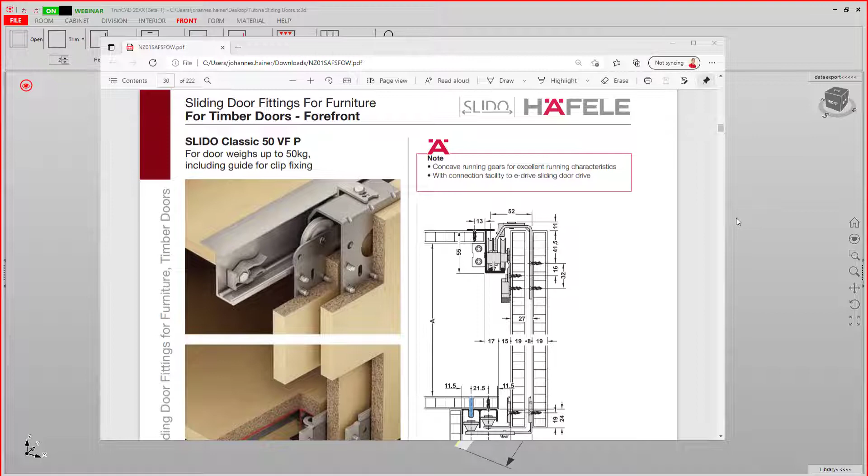Hello, in this tutorial we will create sliding door fittings for front mounting to use in TrunCAD. Therefore, we go to Front, Sliding Door, and here to our hardware settings. First, we need to enter a name for our new hardware.

Then, we need to set the middle overlap of the doors. Then we need to set the overlap on the top and on the bottom. On the top we have 19 mm, since these doors are flush with the upper side of our cabinet.

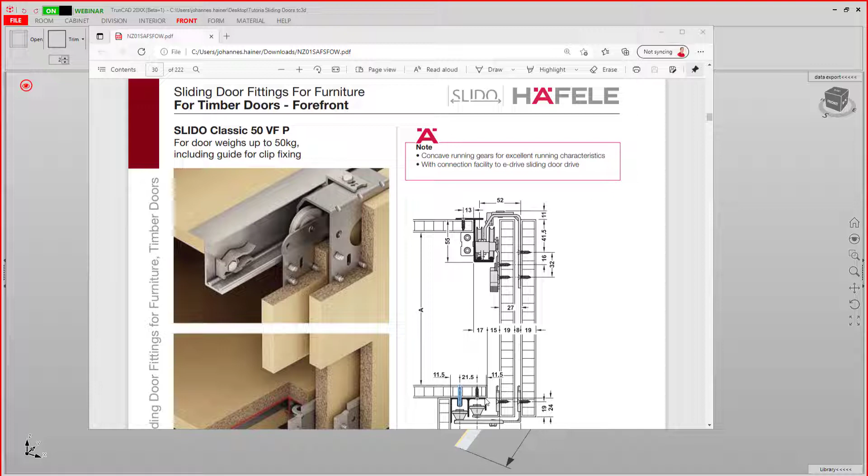On the bottom we have 19 plus 24 mm, since the doors protrude 24 mm over the bottom panel. This means we have 43 mm overlap on the bottom.

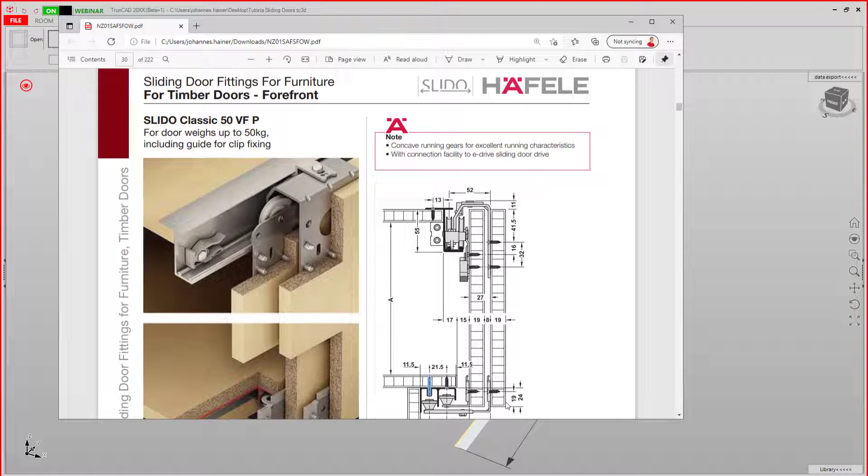The next thing we need to set is our distance of the lanes. First lane is 15 plus 19 plus 8 plus 19 mm. The second lane is 15 plus 19 mm. Therefore, we need to enter minus 61 for the first lane and minus 34 for the second lane.

We don't need a groove this time because we have an aluminum profile. Next thing we need to set is our reference point. This time we take the upper left edge of our door. Next thing we need to set is the direction of the boreholes. This is why minus in this case.

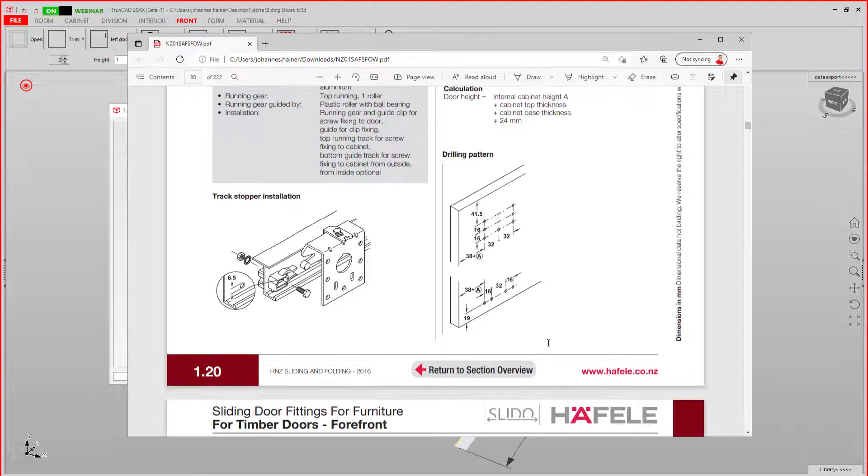Then we can drill our front mounting holes. The first hole in X direction is 38 and in Z direction minus 41.5. Since we use screw mount, we don't need deep holes. We just bore them 2 mm deep. Diameter of 5 and add this. Also make sure to check mirror holes, so that all the holes you add are automatically mirrored.

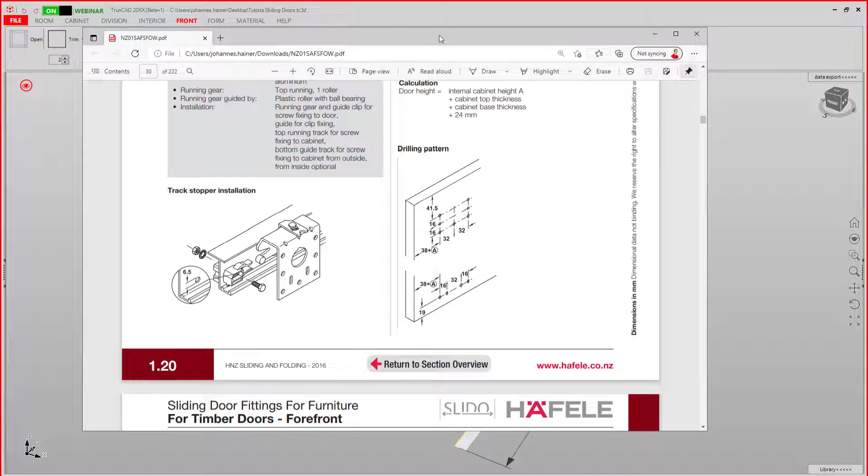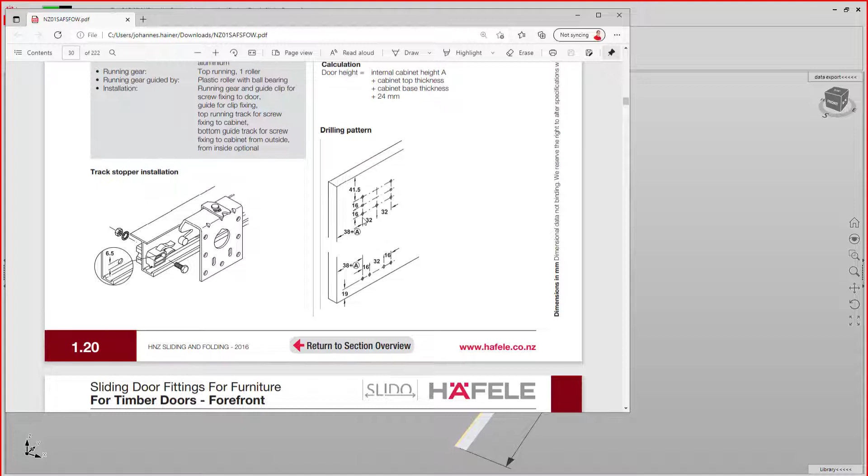The next hole is 57.5 from the top. Add plus. And the next is 73.5 from the top. Also hit plus. The next hole is plus 32 mm in X direction. This means it's at 70.

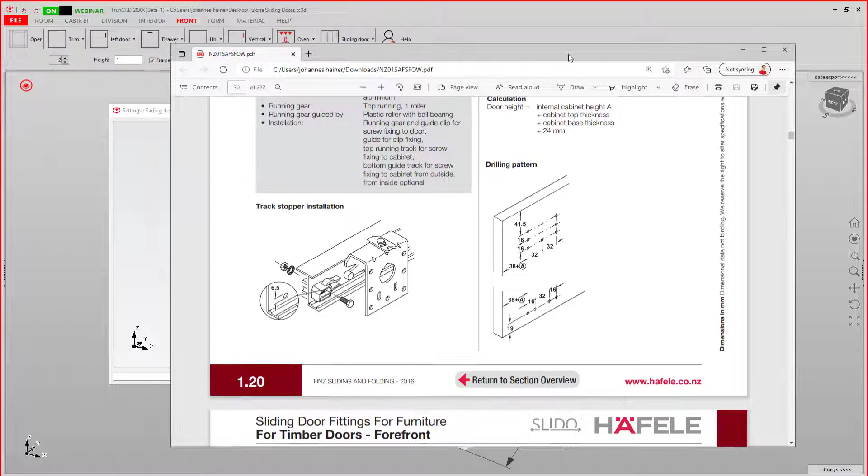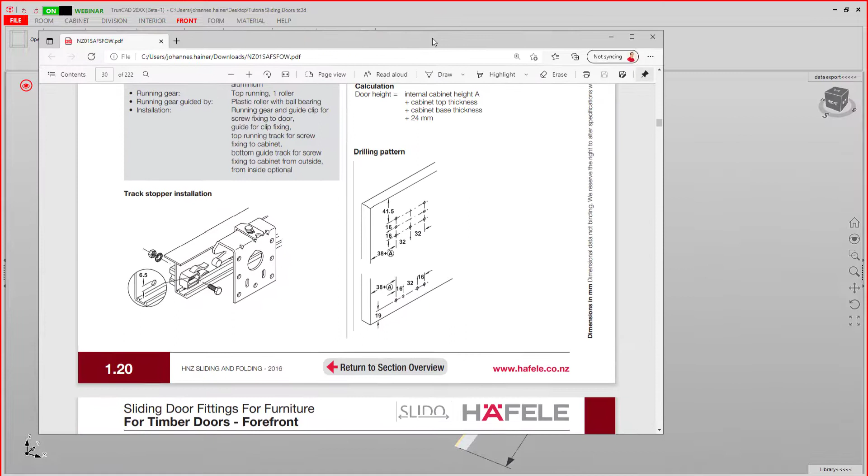Then hit plus. The next one is additional 32 mm in X. We enter the value and hit plus. The same for the next two values. Now that we have the top row, we take care of the bottom boreholes.

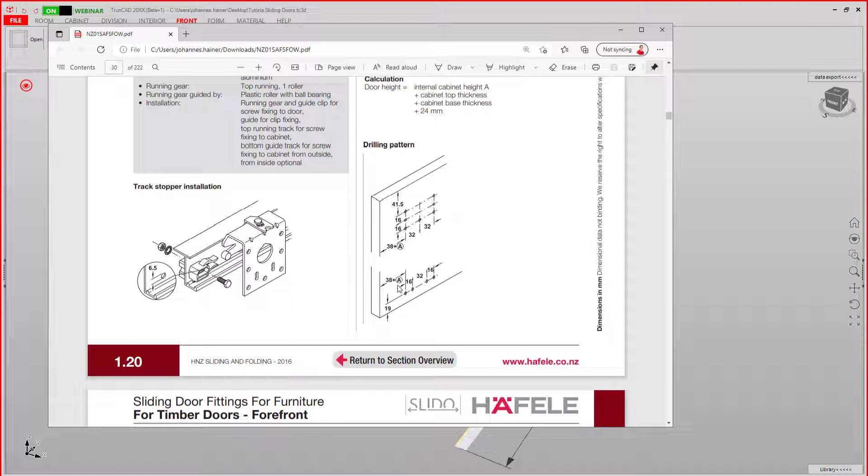The first hole here is also 38 mm in X direction and 19 mm from the bottom. Because of this, we first set our reference point to the bottom left. Enter our 38 mm and 19 mm and hit plus. Next hole is in X direction at 54 mm. Then we hit plus.

Plus 32 equals 86 mm. Then hit plus. The next hole is plus 16 mm, which is 102. Then hit plus again. Then save and close.

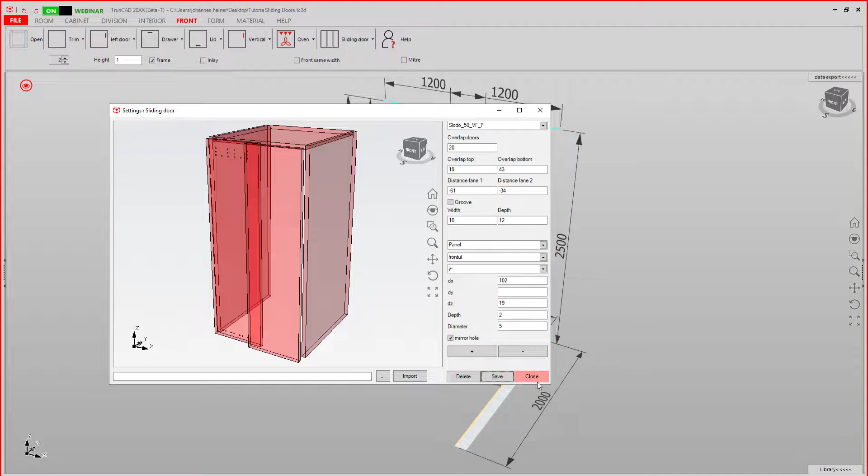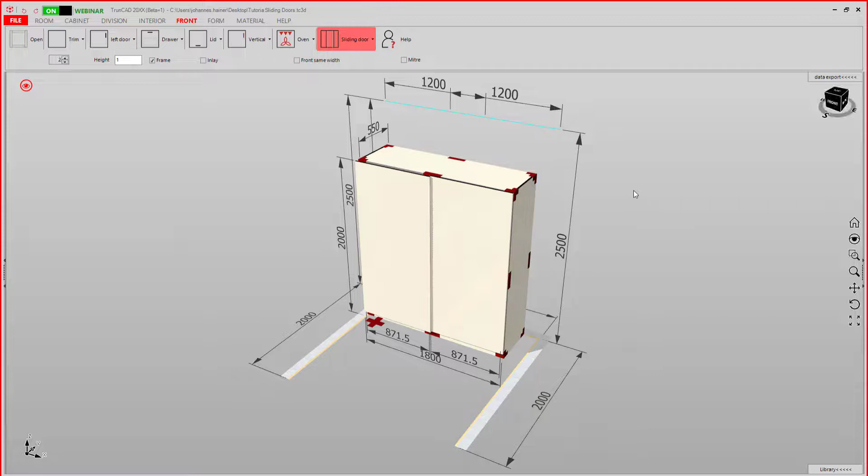If we now take our hardware and drag two sliding doors in the cabinet, the boreholes are automatically added, as you can see here.

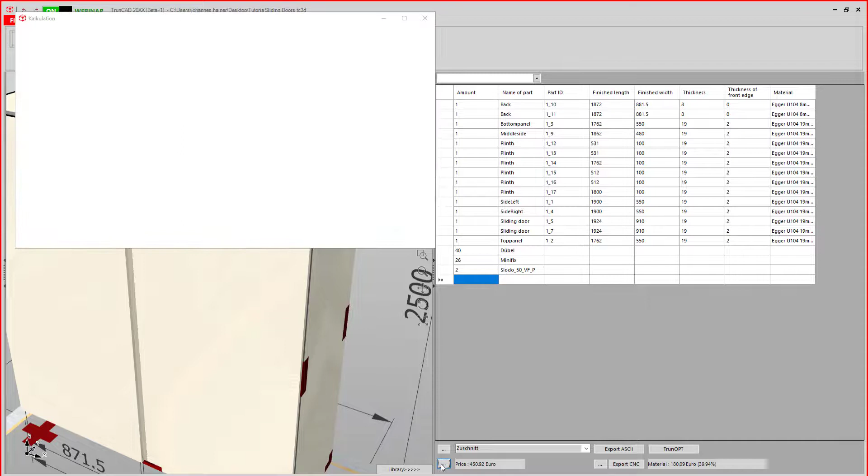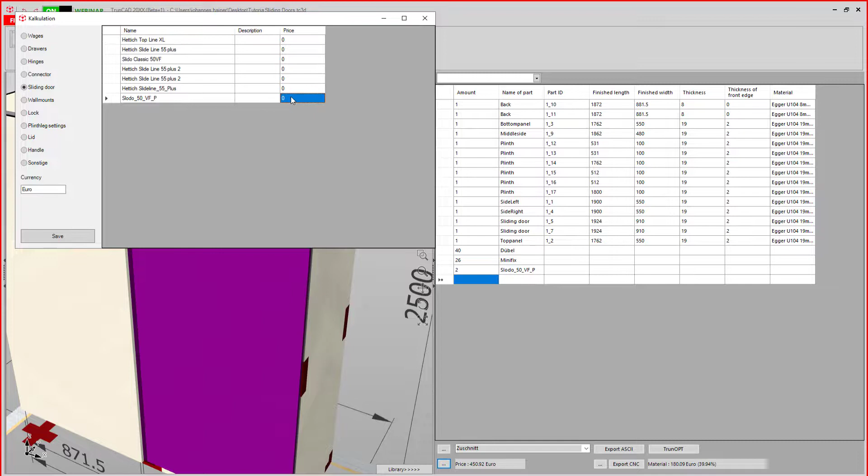Now the only thing that's left is to go to Data Export, here to your calculation settings, and set a value for your hardware. Then hit save.

This was how to create sliding door fittings for front mount for the use in TrunCAD.